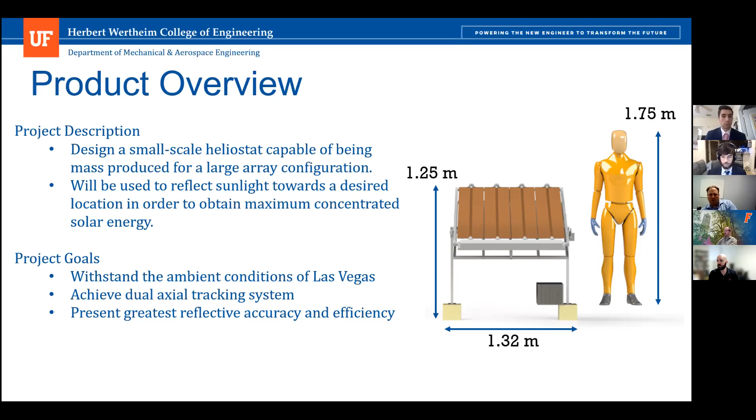In addition to that, we wanted to achieve dual axis tracking with our reflective surfaces. And with these reflective surfaces, we desired to achieve the greatest accuracy and efficiency possible with our design.

Taking a peek at the motivations behind our design choices, we can really break these up into 3 main categories that we set for ourselves to find our basically overarching goal for our project. Those 3 categories were what do we believe we're best at, what we are passionate about, and then what drives our economic engine.

Summarizing and extrapolating from this over the course of an hour's worth of brainstorming, we were able to conclude that number 1, design for manufacturability, and number 2, optimization would summarize these personal traits that we have gathered during our time here at UF. That became our primary motivation.

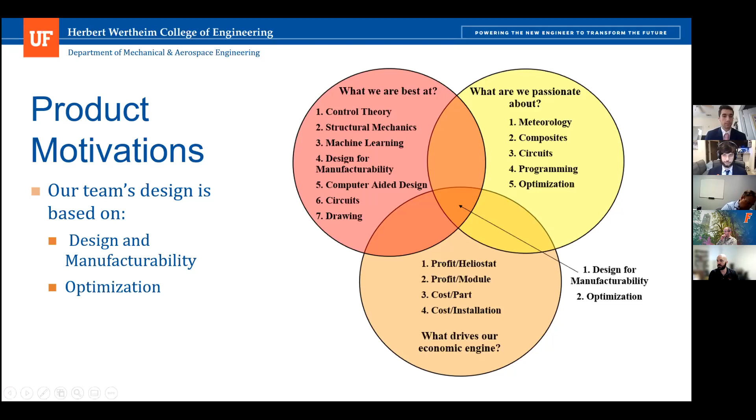I know this next slide is a lot to look at. It is our customer needs flowchart, so bear with me. On the left-hand side, you can see all the needs that we summarized from the customer needs statements. Adjacent to that, you can see the metrics assigned to each of the summarized needs.

Following there, you can see the 4 subsystems that we selected to put into our design as a primary overarching full system. And to the right of that, you can see the functions that each of these subsystems would provide for our design.

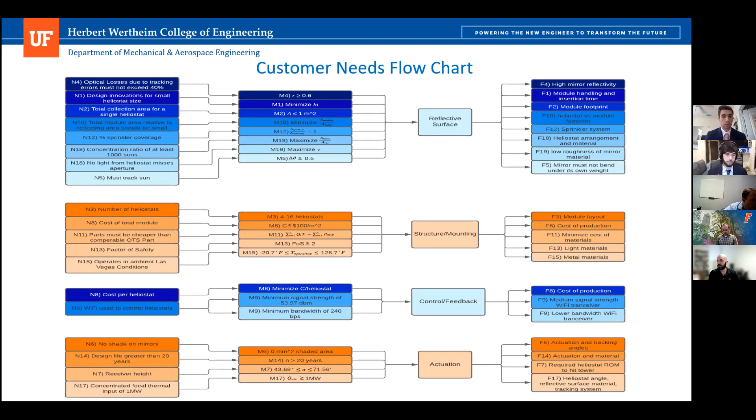So now I want to go over this slide, our heliostat module, and highlight some things for everyone. As you saw on the previous slide, we broke up our heliostat into 4 different modules, that being reflective surface, structure and mounting, actuation, and control.

Just highlighting some of the bullet points on this slide, some of the key features that we identified with our design. The reflective surface is capable of 1.025 megawatts of concentrated thermal input. With our safety mode, which will be described later in the presentation, we have a factor of safety of 39.

Moving to structure and mounting, we have our chassis sitting on top of 2 structural support legs, and those support legs have a bending factor of safety and buckling factor of safety of 10 and 10.8 respectively.

Actuation, you can see the arrow pointing to one of our motors. With that, we have a 56.7-year design life, and this motor is capable of 360 degrees range of motion of our chassis.

And then finally, the little black box at the bottom is our control subsystem, which features a -91 decibel milliwatt and 11 megabits per second Wi-Fi module, and that allows us to achieve a half degree of tracking accuracy.

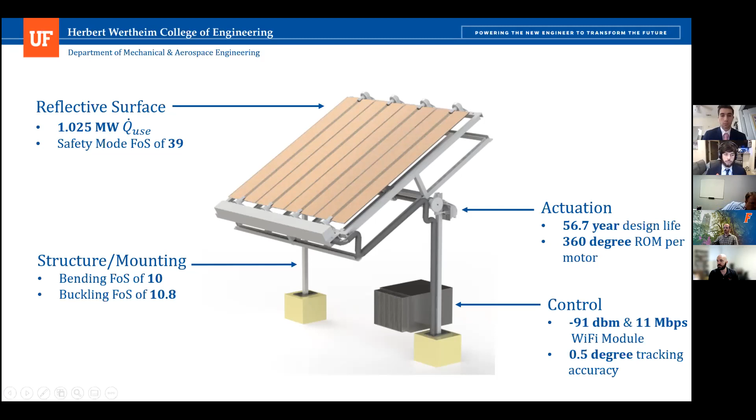So this is kind of a visual overview of all of our different subsystems. As I previously stated, we have reflective surface, and you can see a singular module picture beneath that. Likewise, we have structure and mounting with another picture showing that. We have our control system and actuation showing an exploded view of what really makes this thing move.

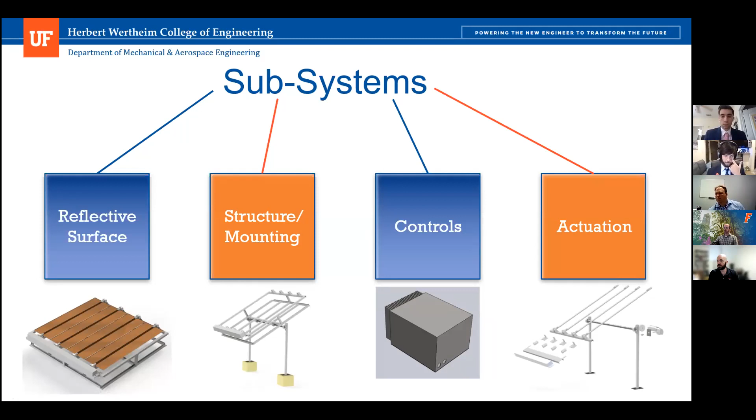So the first module is our reflective surface module. Couple things I want to point out here. Our reflective surfaces are housed in this chassis, so we have a unique shaft mount. Each reflective surface sits in a 1-inch diameter circular shaft with a flat milled out of it, with little overhangs

and set screws to prevent motion of the mirrors while the heliostat is being operated. Towards the bottom of this picture, we have a box that houses our motors that actuate the mirrors in the azimuth direction. And then the last arrow just highlights the chassis. So that's a brief overview of our reflective surface module.

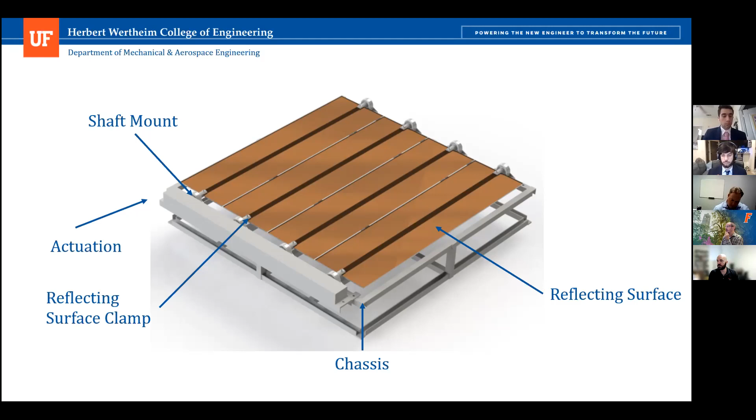And next, we're going to go into some more analyses.

Here we're going to highlight a few of the key features of our reflective surface that differentiate it from other designs. First is its high concentration ratio, which is provided by the silver-backed silica glass reflective surfaces. These supply high reflectivity, which overall increases the concentration ratio and thus the concentrated focal thermal input.

We also have an incredibly low surface to module ratio, which prevents the heliostats from shading each other as they rotate about the azimuth, which also prevents any kind of optical losses due to shading, which again increases the concentrated focal thermal input.

Another key feature of our reflective surface is its wind resistance. As Lane mentioned in the previous slide, we have a safety mode when wind gusts reach anywhere above 50 miles per hour, where the entire module rotates to where it's completely flat. This allows the force of lift and drag on the module to be drastically reduced in these high wind speeds, which prevents the module from being basically ripped out of the ground when the winds get really high.

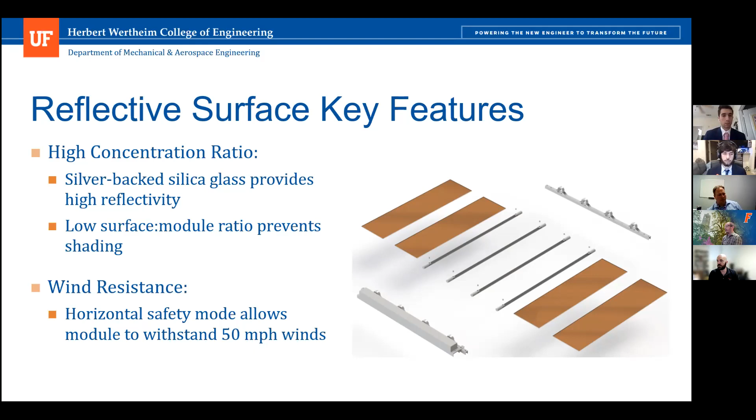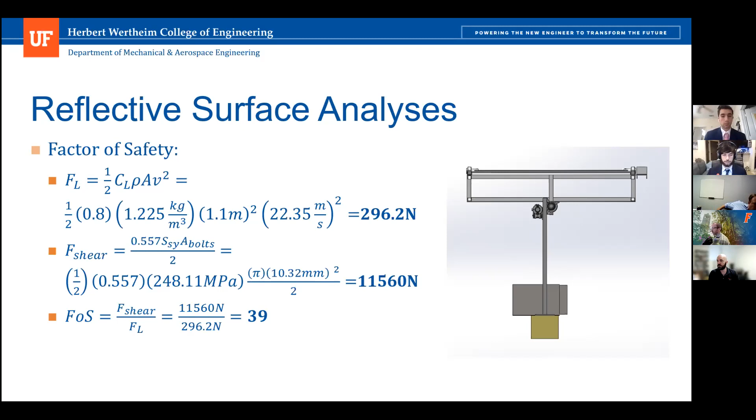Additionally, our module meets the customer requirements for concentrated focal thermal input. If you do a heat transfer analysis on the receiver tower, the energy coming into that receiver is the energy reflected off of all of the modules in the entire field. That's equal to the number of modules in the field, which we assume to be 1,500 in this situation, times the energy reflected per module, which is a function of the radiative energy from the sun shining down onto the module, the total area of the reflective surface, the angle of reflection of the reflective surface, and the optical efficiency of the reflective surface.

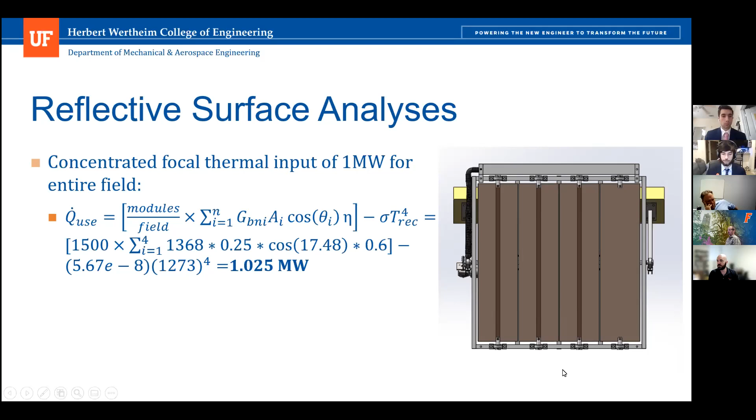All right, so now looking at the structure and mounting subsystem, we have a CAD rendering of our overall structure. Here you can see our chassis. It is made of AISI 1020 steel C-channel with a 1-inch outer profile and a 1/8 inch thickness for the walls.

That composes the chassis, and the shafts inside that hold the reflecting surfaces are mounted via pillow blocks at the top and bottom of the chassis. The main shaft is also connected to the chassis via these pillow blocks. Both shafts are 1-inch 1020 steel rods, and these are mounted into concrete footings sunk into the ground to reduce tipping and uprooting during wind forces.

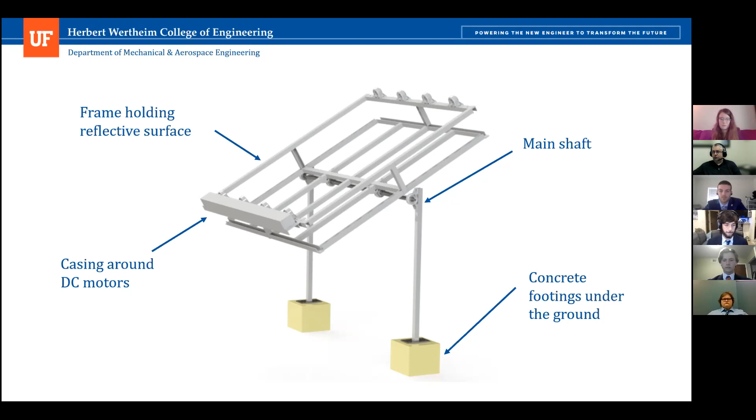Getting into the structure and mounting key features, one of the main things we made sure to do is balance the chassis, as the frame, shafts, motors, motor mounts, and mirrors all sit on this main shaft. Since our reflecting surfaces are actuated through this main shaft, the motor is required to drive it. By balancing it, we reduce any moment caused by the chassis to reduce cost and the power requirements of this motor. The next thing we made sure to do was use C-channel, because we wanted steel for its high stiffness to maintain high tracking accuracy.

But we wanted to reduce the cost and weight of the whole module. By using C-channel, we were able to minimize the mass and cost while keeping the accuracy. The next feature is the open frame design.

One of the big concerns was wind, so by having this open frame, we reduce any impacts of wind on a wall or anything. This improves the aerodynamics, and it also allows water to flow cleanly off the reflecting surfaces, as they will need to be cleaned due to accumulation of dust and whatnot.

Pillow blocks were used for this design because they very tightly restrain the shafts from translating in any direction, but allow very free rotation due to a low coefficient of friction from the embedded bearings. The final key feature is our mirror clamping shafts.

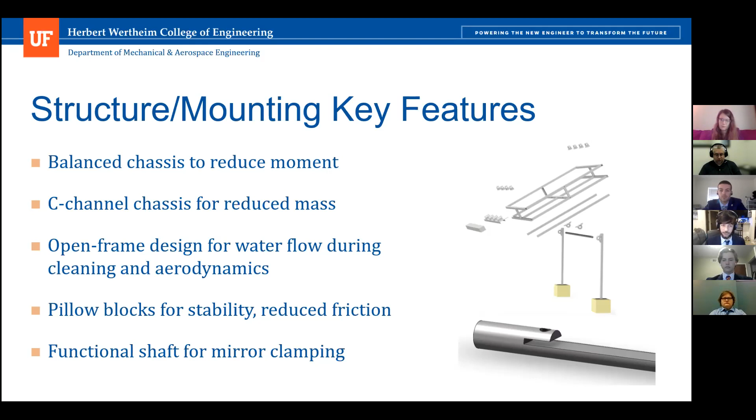To continue off of what Elijah was describing, our structure and mounting subsystem is going to include two main components that ultimately take on the weight of the reflective surface module. The first component is the two shaft types, which create the azimuth rotation and the elevation angle of the structure.

It was determined through bending moment calculations that the main shaft connecting the two support legs presents a factor of safety of 173. Along with this, it was found that the azimuth rotating shafts present a factor of safety of 10. So overall, the structure will not fail due to bending from the weight of the chassis.

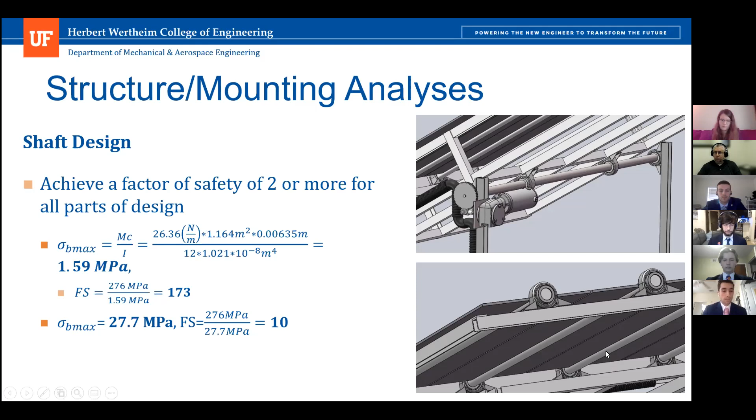The second main component analyzed for our structure is the two support legs, which are connected to the concrete blocks. For this component, we analyzed the buckling acting on the support legs, and found a factor of safety of 10.8. This proves that the chassis and support legs will not fail due to buckling, and the whole structure will not fail due to bending.

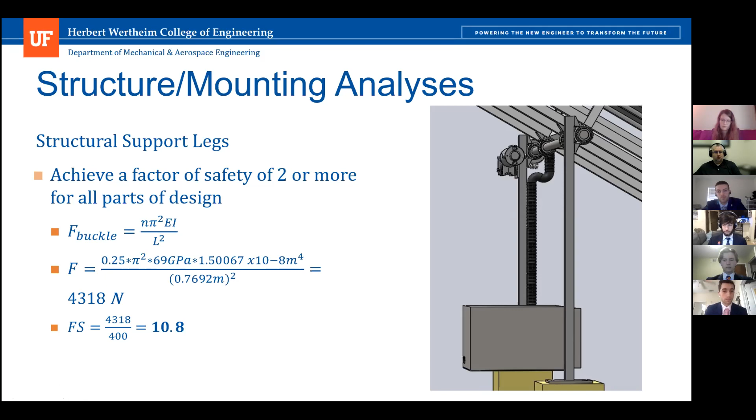Our structure mounting will support 4 individually rotating shafts, which present 4 individual heliostats. The entire structure subsystem is made of steel C-channels, which fail at a melting point of 2,500 degrees Fahrenheit, greatly exceeding the greatest ever recorded temperature in Las Vegas of 128.7 degrees Fahrenheit.

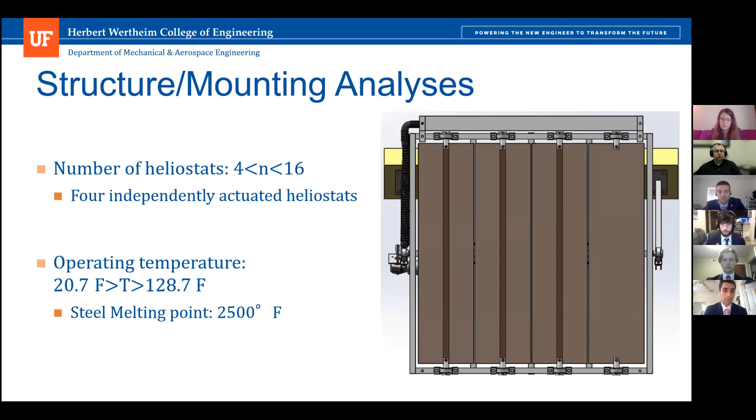Now a bit into our control subsystem. Some key features are its simplicity and accuracy. There is only one Arduino Mega needed to control all of the components in this module, including the 3 motor drivers, the 5 encoders, and the ESP8266 Wi-Fi module. All of these components fit into a neat, compact, easy-to-manufacture 5.5 by 8 by 1.1 inch sheet metal box.

In addition to its simplicity, it's also highly accurate. It implements closed loop angular feedback through the use of 5 positional encoders attached to each motor. This provides robustness to any uncertainty due to installation error or any bending or deflection that could cause tracking inaccuracy. The positional encoders will correct for that.

A higher tracking accuracy leads to a higher concentrated focal thermal input, increasing our total amount of energy. Additionally, the ESP8266 Wi-Fi module contained within this control subsystem has an incredibly high transceiver sensitivity, which means modules even at the very edge of the field will still be able to receive control signals from the main command tower, ensuring that even edge modules maintain less than half a degree tracking accuracy, which far exceeds the customer requirements.

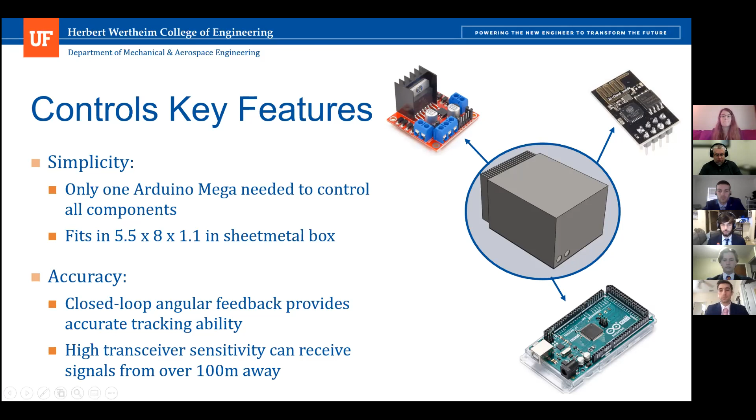Just some quick analyses to prove why we chose the components we did. One of the customer needs is that all heliostats in this module need to be controlled via Wi-Fi from a computer located in the central tower. That being as it may, we needed to choose a Wi-Fi module with the correct required bandwidth and transceiver sensitivity to accomplish this task.

When calculating the required bandwidth, we considered how many bits are needed to represent 360 degrees of motion to about half a degree of accuracy in binary, which comes to around 10 bits per degree. We also considered the rate at which the sun moves across the sky, around 15 degrees per hour, or 0.005 degrees per second. We multiplied this by the number of heliostats per module and the number of modules per field to get a required bandwidth of a very small 300 bits per second to control the entire field of heliostats.

We also, in addition to bandwidth, have to consider the sensitivity of the receiver module on the Wi-Fi module, because if these things are going to be communicating with and receiving signals from a central tower, we want to make sure they are able to receive that signal.

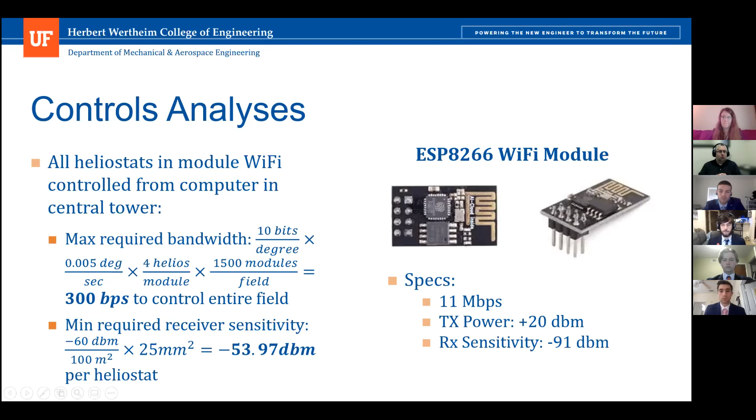Another thing you're probably wondering is why we chose an Arduino Mega instead of a smaller microcontroller. We did an analysis of the required number of digital input pins, digital output pins, and pulse width modulation pins required to control all of the encoders in the module, the motor driver, and the Wi-Fi module.

The number of input pins for the encoders is around 2 per encoder for both channels. Additionally, for the motor drivers, you need 4 digital output pins and 2 pulse width modulation pins per driver to control the speed of the motor. All in all, adding these up gives a required 24 digital I/O pins and 7 pulse width modulation pins per module.

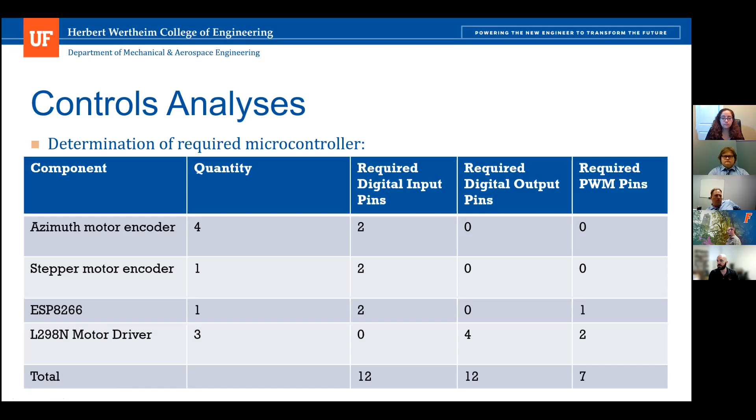If you move on to the next slide, you can see the Arduino Mega is basically the smallest microcontroller we could find at the lowest price that meets these specs, with 39 digital I/O pins, 15 pulse width modulation pins, and a 5-volt DC operating voltage. That's why we chose this microcontroller.

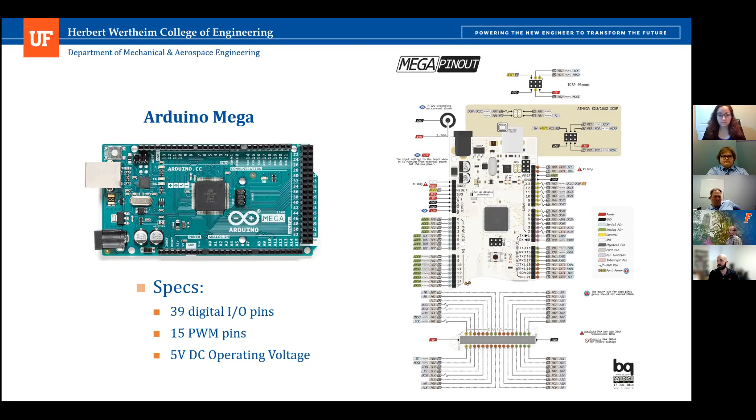Okay, moving on to actuation. This image shows the actuation components required to rotate the mechanism, including the supports, the rotation shafts, as well as the motors and motor covers.

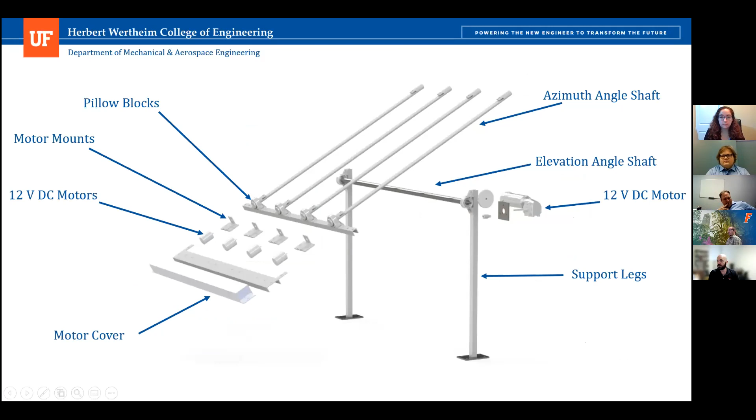Some key features of this actuation design: we have a singular azimuth rotation axis, which allows us to have a lower motor-to-mirror ratio, whereas the conventional heliostat has 2 motors per reflective surface. Our design allows us to have 1.25 motors per reflective surface. Another feature is the Denso gear motor used to power the azimuth rotation shaft, which uses gears to increase torque so we can get away with using a cheaper motor.

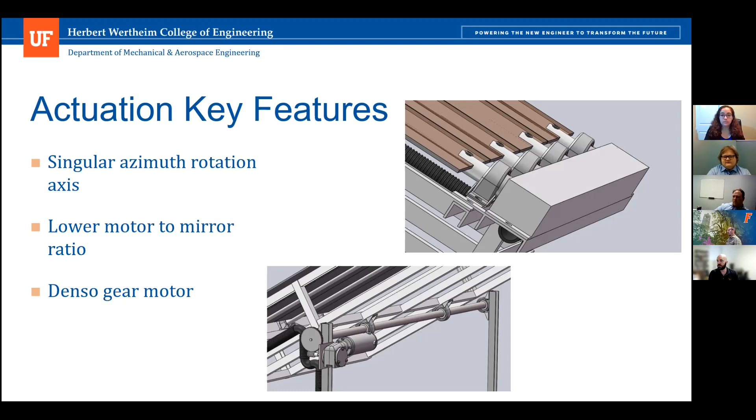To move on to the analysis, in order to achieve the required range of motion for our heliostat, we needed to calculate the height of the chassis so that the sun rays would not get blocked by the chassis while traveling to the reflective surface. After performing these calculations, we arrived at a chassis height of 0.123 meters.

Additionally, we performed a design life motor analysis on the motors. To do that, we took the total distance traveled in 10 years as well as the distance traveled per day, then divided the total distance by the distance traveled per day, which gave us 56.7 years for our motor life.

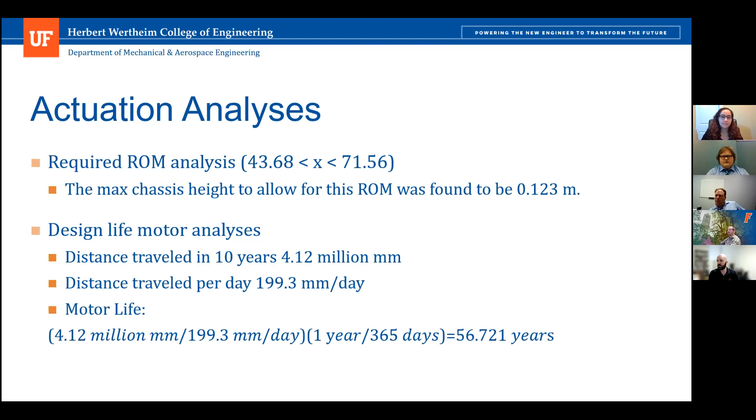And of course, with all things comes a cost, and we had some off-the-shelf parts that we couldn't personally make on our own, and those would be the motors, the pillow blocks, the fasteners, the gears, and the control box components like the Arduino Mega. And then a lot of the parts that we could manufacture ourselves, we decided to do that. Those would be the raw materials like the steel, aluminum, reflective glass, and concrete, which make up the chassis and the shafts.

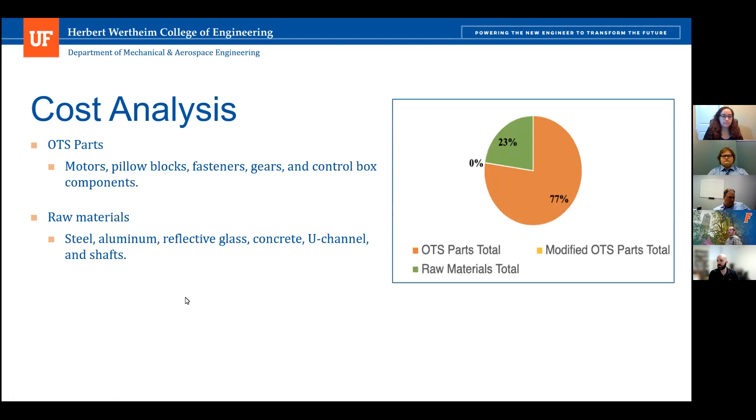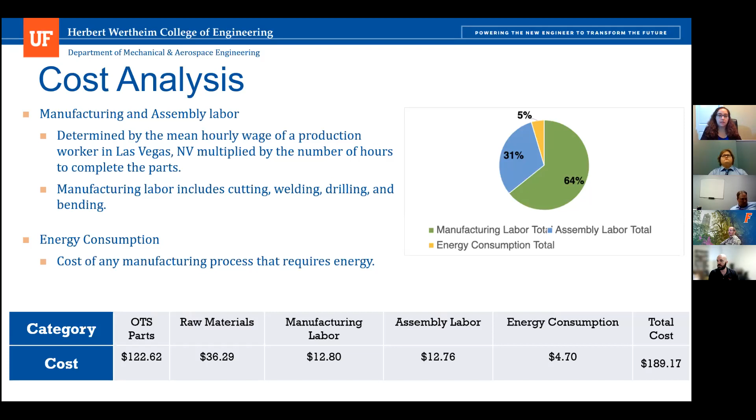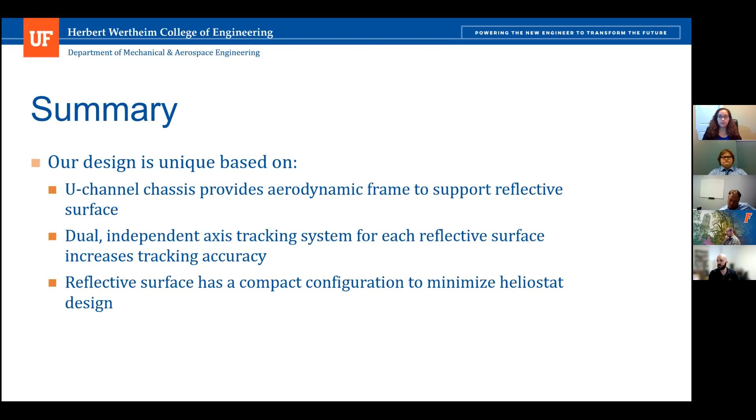In conclusion, even though we have a high cost, we have other unique features like tracking accuracy and structural robustness, which ensure other customer constraints are met. Our goal within the project to have optimization and a simpler shape for easier manufacturing was also achieved within the project. Thank you so much for your time.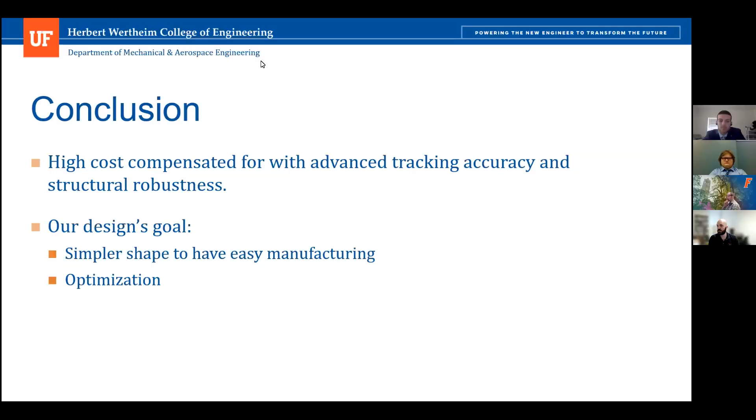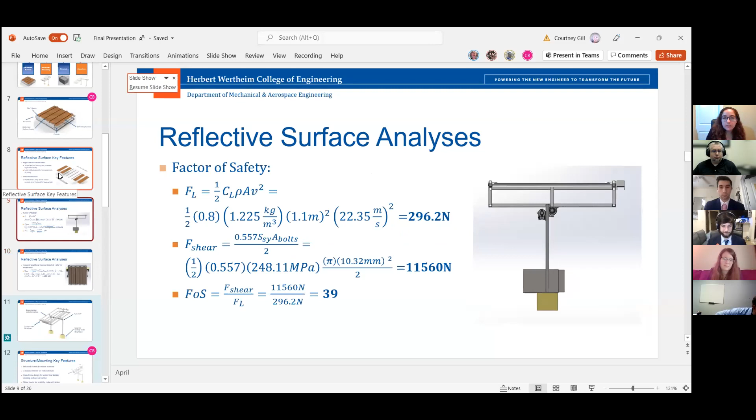Professor Trong, can you enable screen share again? Yeah, sorry, thank you, there you go. Yep. Was this a slide? Maybe back one slide. Oh, maybe it is with the... so there was a comment where someone mentioned that it was... I was looking for it. Yeah, right there, okay, right.

So your outgoing temperature, you're assuming 1,000 degrees Celsius. That seems awfully high. Yes, that was actually provided in the customer needs statement. They said assume a receiver temperature of 1,000 degrees Celsius, so that's why we have that. Okay, that's just, I mean, that's above the melting point of aluminum, that's why I was curious.

Okay, and then so you're going to do 1,500 of these modules, which would be 6,000 heliostats. Do you have a general idea of how that's going to be arrayed out in the field? Is it just a linear stagger pattern, or how is it in relationship to the receiver versus the transmitter? Maybe I just missed that in the presentation. Yeah, most likely it would be, as you suggested, a linear stagger pattern to prevent any kind of shading of the modules. I know there are some research papers with specific formulas of how, based on the size of the module, you would arrange these heliostats in the field, but that's something we will most likely further consider as we move further along in the design process.

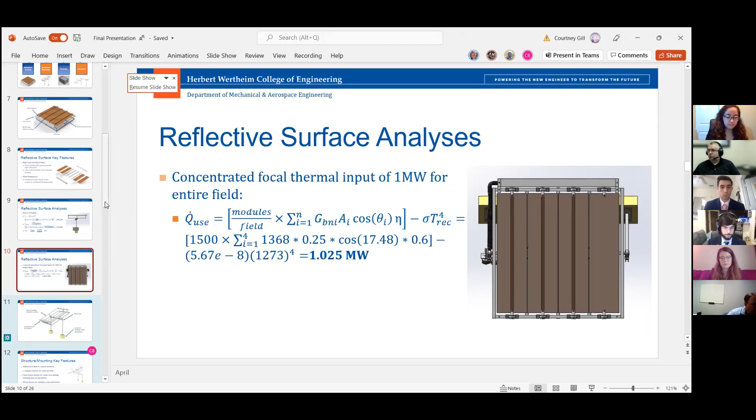There was an accident that we didn't see at the very beginning, that we changed the costs later, and so the pie chart is different by accident. We apologize for the error. Oh no, that's okay, just something that caught my eye.

And then finally on cost, I would add, based on when I look at customer needs and when you talk to customers, cost is usually a huge driver, right? Your price point that you're attempting to get to is $100, and you're almost double that. I understand your discussion of why you would, but that's usually a very tough sell to the customer. So do you have any plans to modify your design to try and drive that cost down?

Yes, we do have various plans to reduce the cost. We actually started out with the poster presentation at 400 something, so we've been figuring out multiple different ways to decrease the cost, many of which I tried to mention. Like welding instead of the use of so many fasteners. And we're changing the motor covers and the motor mounts to be a different material than steel, since those don't actually need any structural function. So we're changing those to be 3D printed instead of steel. So we are trying to find many ways to reduce the cost to try to get it back down more in the range of the customer.

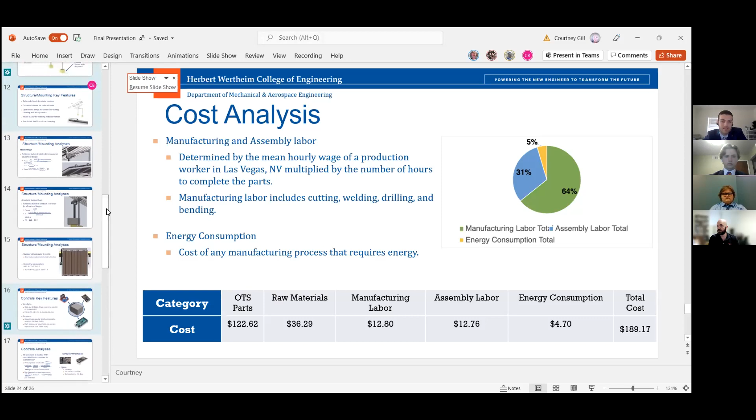Okay, so right, you're going to have wind loads that you're going to have to deal with as well, right? Potentially from a buckling situation. So you're going to have to look at, potentially you're going to drive down, you're probably still good with your factor of safety there, it's just going to drive it down a little bit to also consider that as well. Yeah, yes sir, that is something we need to look at for sure.

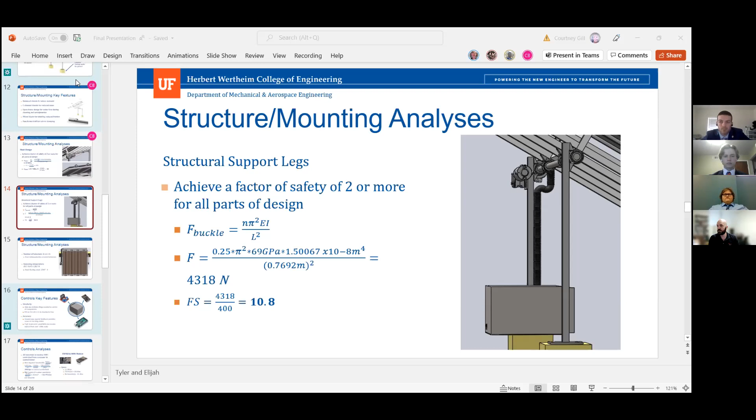Okay, so just a suggestion, I would suggest maybe doing a shear and moment diagram here with a free body also associated with it to make clear how you're loading up this structure, because I'm not quite certain that the assumptions that you're making there are correct, but I would have to see what you're looking at from a free body diagram standpoint.

Yeah, we did do more in-depth analysis for one of the previous projects, but it was kind of difficult to make those fit in here, so that's why we went with a more simplified demonstration of its safety. But yeah. Okay, fair enough.

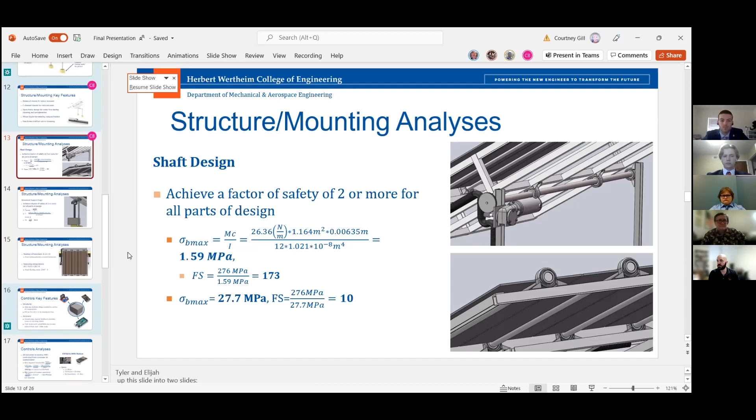The other thing is throughout your presentation you seem to shift between Celsius, Kelvin, and Fahrenheit for temperature. Try to be more consistent with how you present your temperature data so that one slide can relate easily to the other, and the person viewing the presentation can relate one thing to the other.

Thank you, we appreciate it. And that's all I've got.

I was hoping you'd jump in because of all the neat control and computer speed calculations these guys did. I admit, at first reading over your slide I was confused about why you needed an Omega and why you were calculating in all the modules. Now I understand you have 5 different axes that you're driving.

With those 4 or 5 different motors, what do you have in terms of limit switches for calibration and end stop? That's a question for Jacob, since he's been working on adding those limit switches to the design.